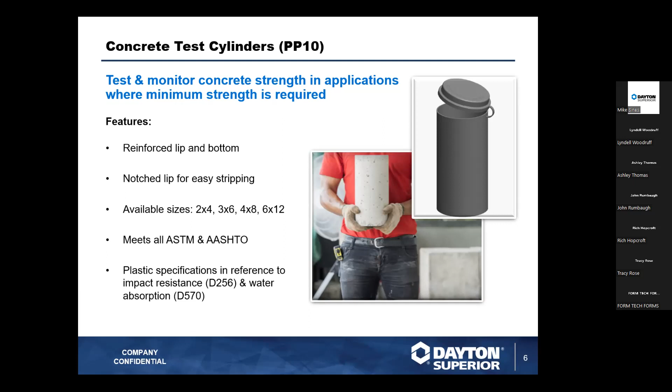Depending on the specifications for the application, different size cylinders may need to be used. We offer 2x4, 3x6, 4x8, and 6x12 cylinders. All these cylinders come with an attached lid, except for the bigger 6x12 cylinder that requires a removable lid ordered separately. The plastic specifications for these cylinders meet both the impact resistance and water absorption tests required by ASTM.

Next, we have the hole-in-one covers. These are versatile covers used on floor slabs or other on-grade scenarios where a hole is temporarily exposed, preventing tripping, falling, and other accidents from occurring on the job site. There are 4 different size options that are all adjustable to meet the needs of your job site—2 round options and 2 square options. If you look at the images, you'll notice they're a high visibility orange color and have a beveled edge for easy recognition and preventing trip hazards on the job site.

When purchasing the hole cover, you will receive 3 bolts and 3 threaded wedges. Just 2 large screwdrivers are needed to install this hole cover. If you look at the round hole cover on the screen, you'll notice there are 3 slotted channels. First, you insert the black wedges into the underside of these channels. Next, you thread the bolt through the cover and into the wedge to secure the wedge onto the cover.

After all 3 of those are loosely attached to the cover, don't tighten them all the way. After you verify that the bolts are spaced to the proper distance for the hole, tighten all but one of the bolts. Next, place the cover over the hole, and using one of your screwdrivers, push the wedge against the outside of the hole and tighten the last bolt. Tightening this last bolt will secure the cover on top of the hole so that no one will trip over it.

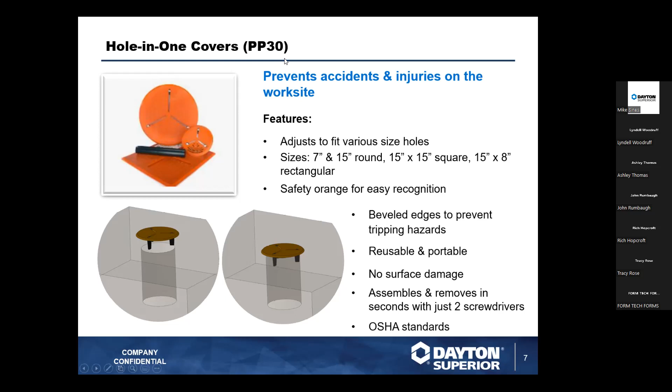Next, we have the Paragon Rebar Safety Cap. These are designed to be used in applications where impalement protection is not required.

Whenever dealing with exposed rebar at grade, it's important to cover the ends to prevent any incidents on the job site. To install these caps, firmly press the cap onto the piece of rebar, ensuring the underside of the mushroom cap touches the edge of the protruding rebar. Small fins on this cap allow various sizes of rebar to snugly and securely fit inside, so the orange caps don't fall off after installation.

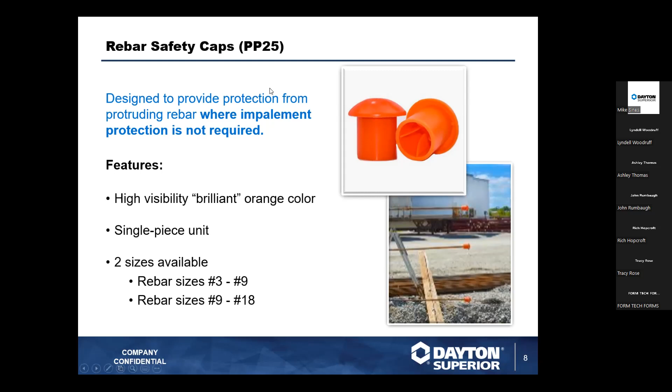Next, I'm going to get into some of the post-tension products. In general, post-tensioning is a method of pre-stressing a concrete element before it's loaded in its intended application to enhance the strength of that element. Post-tensioning allows for thinner panels, longer spans between supports, and reduces the risk of the concrete cracking once it's in use.

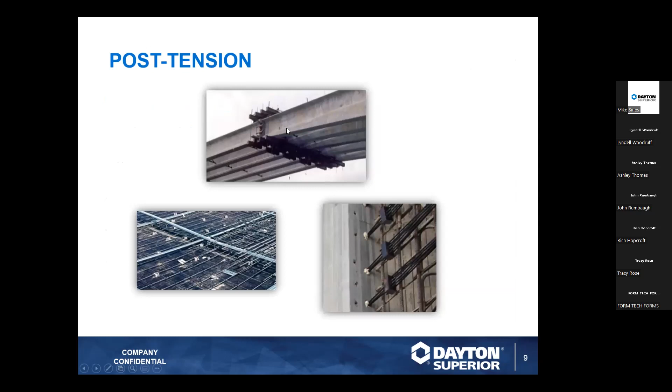The first post-tension product I'll discuss is the pocket former. It slides over the live end of the steel strand that will be tensioned after the concrete hardens. Once the formwork and pocket former are removed, a void remains in the concrete, allowing easy access for the post-tension chuck to be inserted onto the steel strand. After the strand is chucked, it's tensioned, cut, and the remaining void can be grouted over, so there are no visible remainders of the cable on the outside of the concrete surface.

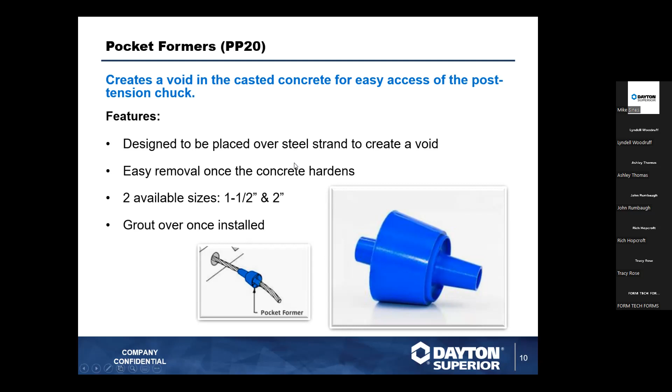Next, we have the cable end caps. These end caps and clearance caps are used on half-inch diameter steel strands in post-tension applications.

If you look at the top image, you'll see two different styles of caps. The clearance cap is designed to go on the end of the strand that is already anchored in the concrete, also known as the dead end. Looking closely, you can see it has a finer point. This end butts up to the formwork, keeping that dead end strand away from the concrete surface, reducing the risk of rust marks appearing later in the concrete's life.

The other style of cap is the end cap. This is placed on the live end of the strand after it's tensioned, chucked, and cut. As with the clearance cap, this end cap reduces the risk of rust stains appearing on the concrete surface after the void is grouted over.

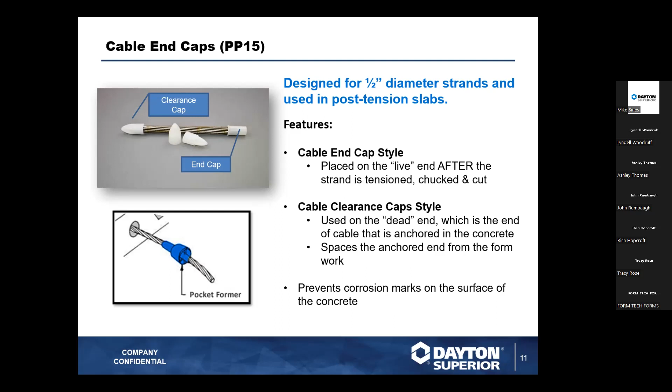Next, we have intersectional chairs. These chairs support steel strand in slab-on-grade applications, providing a specified amount of concrete cover. They're designed to support both 3/8 inch and half-inch diameter strands in post-tension applications.

If you look at the image on the right side of your screen, you'll notice the chairs have tips at the top of the tabs. This ensures the chair snugly hugs the steel strand, so if the cables move, the chairs won't fall off. There's a wide, stable base on these chairs, and it can hold cable from either direction. There are offerings from 1.5 inches through 5 inches in half-inch increments, depending on whatever your application calls for.

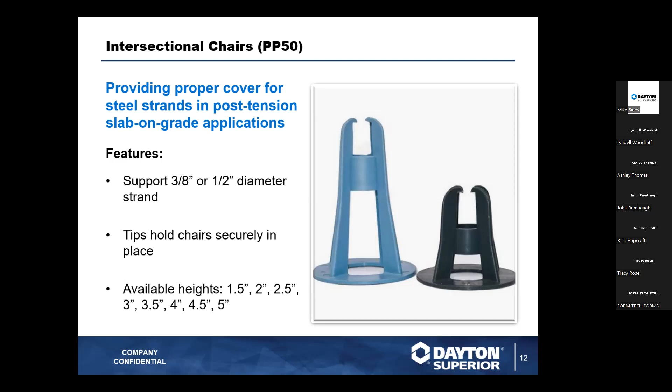Next, I'm going to get into discussing some of the general infrastructure products. Infrastructure can cover many different applications, including roadwork, bridge construction, and drilled shafts.

First off, we have dowel bars, caps, and chairs. In general, dowel bars are used in both new construction and retrofit applications. The dowel bar's purpose is to improve the performance of joints between slabs. They keep slabs level with one another and transfer the load from one member to the adjacent member. These chairs and caps are specifically designed to work in retrofit applications.

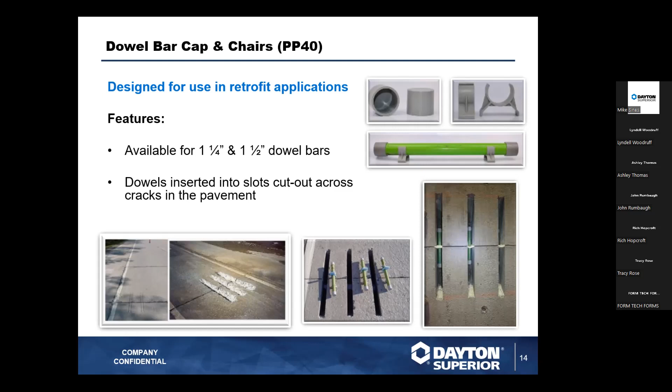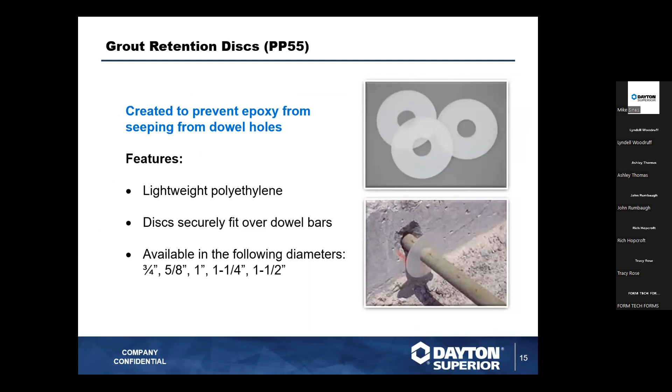Next, we have grout retention discs. While on the topic of dowel bars, I'd like to talk about these. They are lightweight plastic discs that snugly slide over the dowel bar, designed to prevent grout or epoxy from seeping from dowel holes. They help keep the anchoring material sturdy in place so the dowel bar doesn't fall out of the hole. There are various sizes available depending on the diameter of your dowel bar and the various applications you might need.

Next, we have centralizers. In order to achieve the specified design strength of a drill shaft, it is important to maintain proper concrete cover throughout the entire length of that element. Centralizers can be used to center that piece of rebar in the center of a piling or drill shaft.

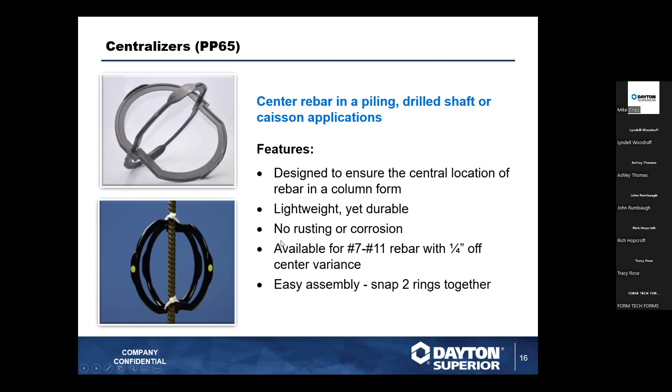Next, I will go over the next product, the auger cork. Although these are plastic, they are called corks because they were originally made from a cork material. This auger cork is placed in the end of your 3-inch grout hose in order to prevent dirt or debris from getting in the hose when it is being lowered into the drill shaft. When it is time to start pumping the grout, the pressure from the pump blows out the cork and the drill shaft can begin filling with grout or concrete.

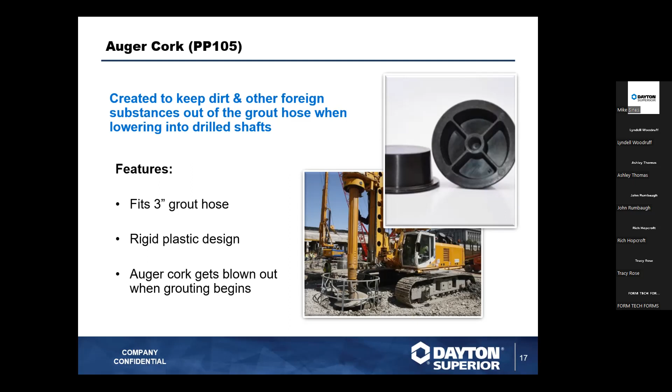As most of you are probably familiar with plastic wheels, these plastic wheels provide proper rebar cover within various types of form. When I refer to cover on plastic wheels, I'm referring to the distance from the outer surface of the rebar to the outer edges of the wheels. If you look at the above images, you'll notice that there are clips in the middle of the wheels that snugly fit over the rebar.

Additionally, there are locking wheel options where once the wheel is secured over the rebar, it will not come off if the piece of rebar is moved around. So just keep an eye out for when you're ordering if you want the locking wheel or not. These come in a concrete gray color as to not be visible once the formwork is removed.

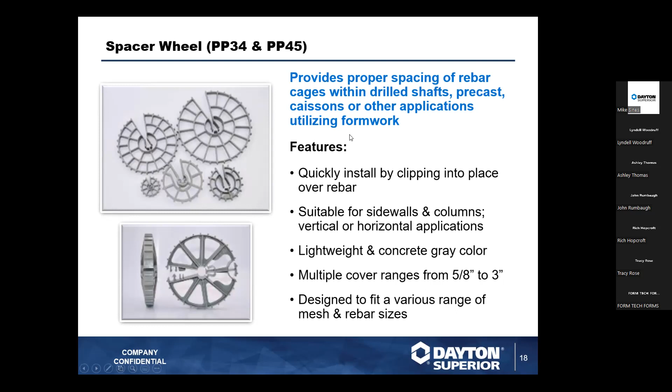Next, I'm going to get into some of the Paragon precast options.

First off, we have the precast wire chairs that are used to support wire mesh in precast elements. These are molded. If you look at the image above, you will notice that these are molded out of a concrete gray plastic, and these contain a minimal footprint that is not visible from the surface of the concrete. If you look at the image again, you'll see that there are protruding fingers on the tops of the chairs. These are designed to snugly grip onto wire mesh so as to remain on the mesh if the mesh is moved around a little bit.

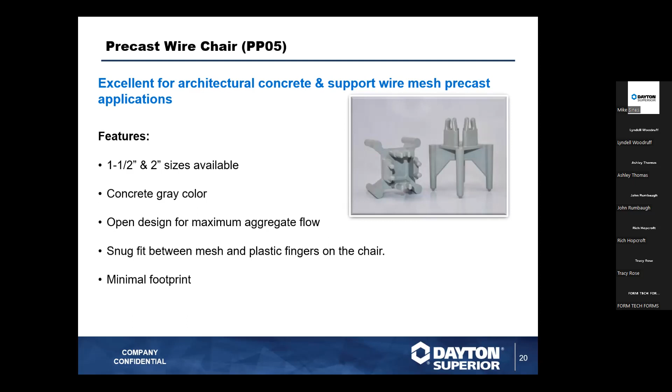Next, we have a more unique product. We've got the hog slat chairs. These chairs were designed to support rebar in slat flooring for swine barns. The chairs securely hold two pieces of rebar in place. If you look at the top right image, you will notice that the slots in the floor create relatively long stretches of concrete that are not supported on either side. In order for the floor to support the weight of heavy livestock while also maintaining gaps for proper drainage, a double layer of rebar is utilized.

There are 3 different sizes of chairs available, and their descriptions indicate the size. If you look at my screen, I highlighted an example. The first value denotes the size of the rebar that snaps into the top of the chair. The second value denotes the size of the rebar that fits into the middle of the chair. And the third value denotes the concrete cover from the middle piece of rebar to the bottom of the chair. Although these were initially designed for a very specific application, I'm sure you guys could probably figure out other ways to use these chairs.

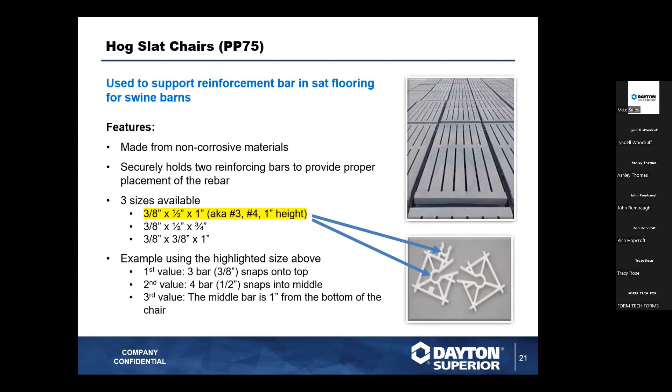Here we have another precast product. We have panel and waffle pads. These are designed to protect precast units during storage and transportation. They allow multiple concrete elements to be stacked without worrying about any surface defects from occurring.

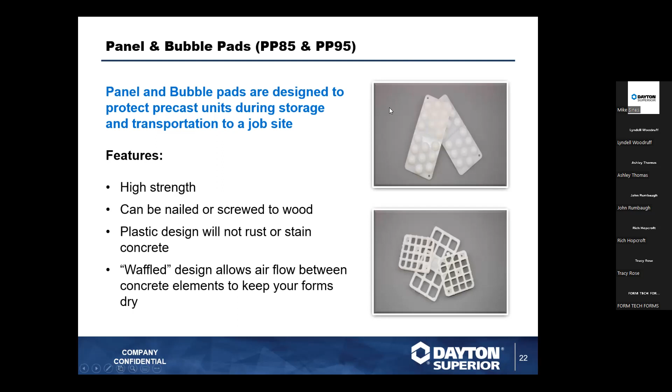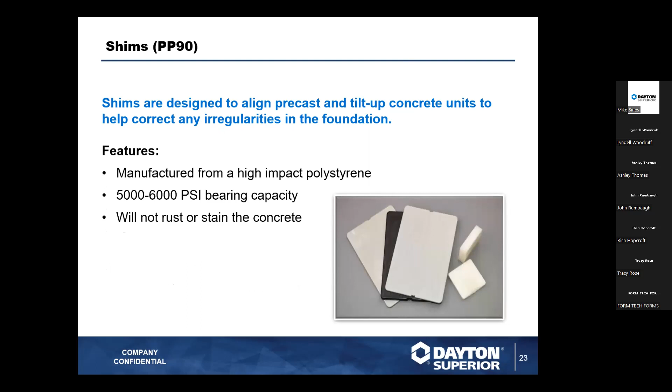I'm finally going to go over some of the miscellaneous bar supports that can be used across many different applications.

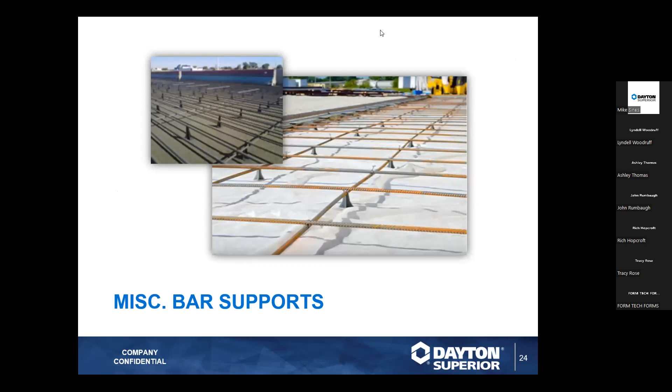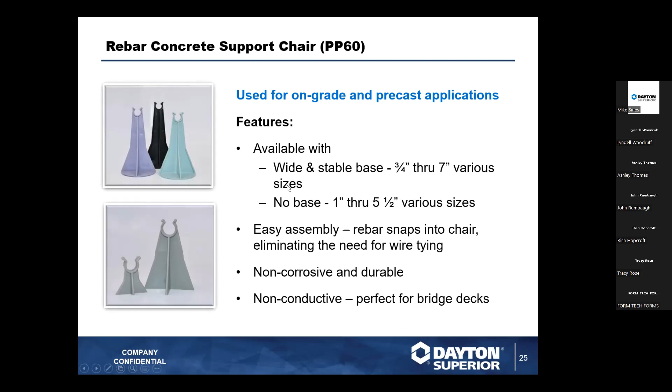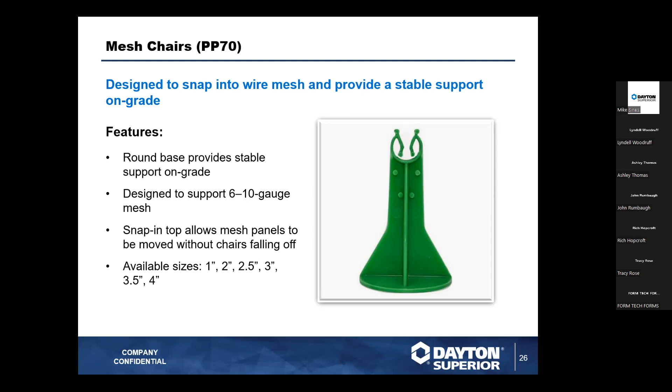Next, we have the mesh chair. This chair is very similar to the previous chair, but the main difference is the top receptacle features a different profile that is better equipped to snugly grab onto wire mesh. This also has a round base that provides stable support for gauge 6 through 10 mesh. The snug fit between the chair and the mesh panel eliminates the concern of the chair falling off if the mesh is moved around a little bit. There are sizes ranging from 1 inch to 4 inch, depending on what your needs are.

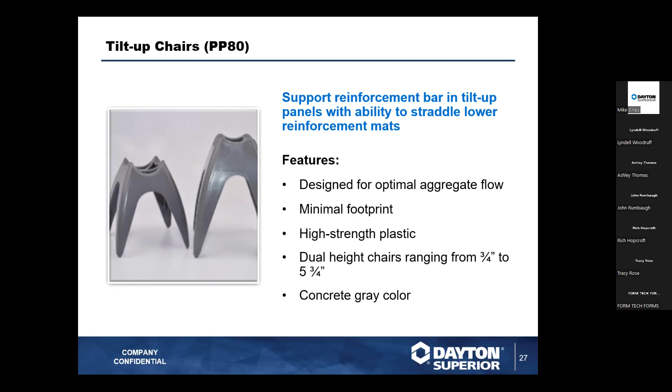Now, I've covered a lot of different products in this presentation, so as always, please check out our website for additional information or for specific part numbers and specifications. Tech data sheets, product pages, handbooks, and more are easily accessible via the drop-down menus and search bar on our website. I will now hand this back over to Heidi so she could discuss the superior deal.